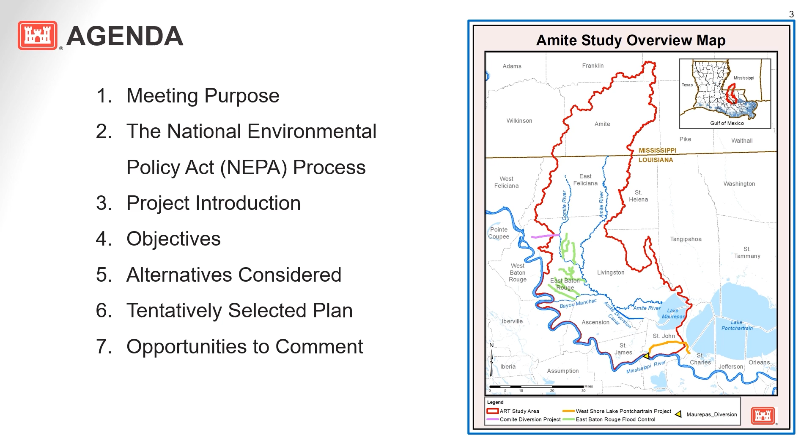So over the next few slides, I'll be covering several items, including the presentation purpose, as well as the background of the feasibility study, which will lead us to the tentatively selected plan. So what is the purpose of this presentation? I am informing you about the Amite River and Tributaries Feasibility Study. The draft report is available for public review now until January 29th, and it provides information on how the tentatively selected plan was selected, as well as provides details of that plan and how the study is complying with the National Environmental Policy Act.

And so our main goal here during the review period and during our scheduled virtual meetings is to hear from the public. And we would like to hear your thoughts on the tentatively selected plan. And so this serves as an opportunity for the public as well as other government agencies and partners to have their voices heard.

And so what is the National Environmental Policy Act, or NEPA? NEPA was signed into law by President Nixon on January 1st, 1970, and it is the underlying environmental law requiring all federal agencies to notify the public of proposed actions, solicit their input, develop and evaluate a range of alternatives, and explain how decisions were reached. And we're at that stage in the NEPA process where we've identified our purpose and need and considered a range of alternatives and their impacts. Currently, the Corps of Engineers has identified a tentatively selected plan for this study and is notifying the public through our report and through the virtual meetings of the proposed action, and we are requesting your input.

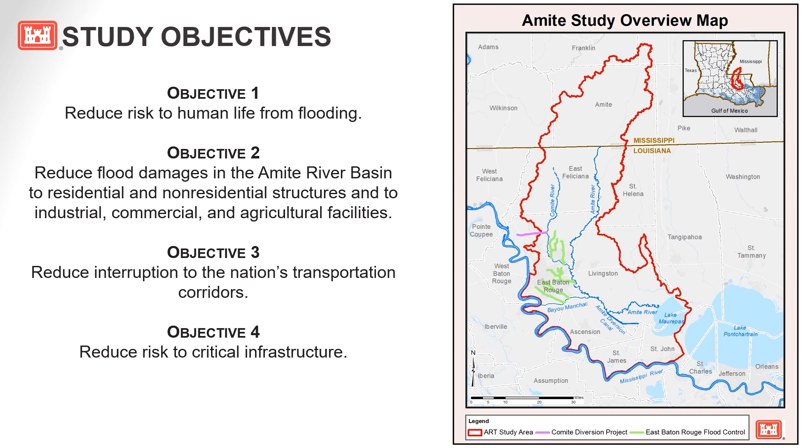And it is important to note the coordination in our feasibility study because it is through early and continued coordination with the public, stakeholders, and other agencies that we develop alternatives and conduct that planning process. And so it is an essential key part of the feasibility phase. And so this coordination helps in determining the appropriate level of documentation and analysis needed in developing and refining the study purpose, goals, objectives, constraints, and the range of alternatives to consider.

And agency coordination helps us determine the impacts to the resources, possible mitigation measures, opportunities for environmental enhancement, as well as in identifying the NEPA and permit requirements of other agencies. And so since the start of this study, we have been engaged with our non-federal sponsor, the Louisiana Department of Transportation and Development. And then during the early phases of planning, we held several public information meetings as well as government stakeholder meetings with federally recognized tribes.

Subsequently, 2 in-person public NEPA scoping meetings were conducted by the New Orleans District in December of 2019. And the purpose of these meetings was to present the stakeholders and the public with alternative plans that had been developed under the study, and then obtain feedback to ensure that the study area's problems were being addressed by the alternatives being considered.

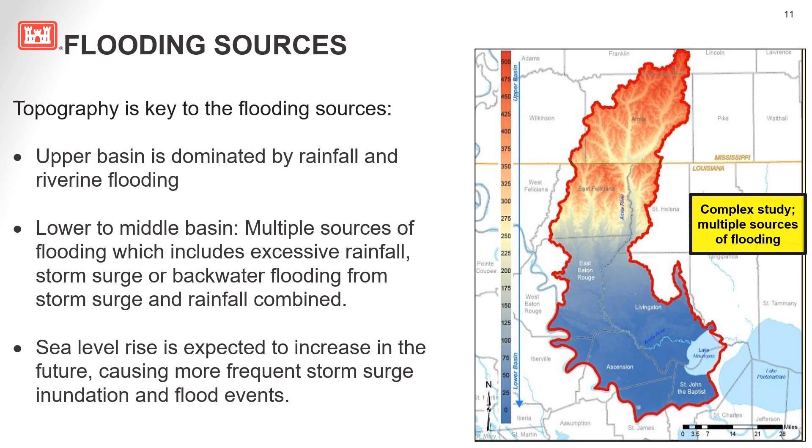The non-federal sponsor for this study is the Louisiana Department of Transportation and Development, and we have partnered with them throughout this process and will continue to do so.

And so the Corps of Engineers refers to studies as being 3x3x3 compliant. And what that means is that studies are to be completed in 3 years, $3 million, and with 3 levels of vertical team engagement and review from district, division, and headquarters. And so this is required by law in the Water Resources Reform Development Act of 2014.

And this process is centered around decision-focused planning rather than, say, task-oriented planning. And so you're reorienting the planning process away from simply collecting data or completing specific tasks, and then you're focusing it on doing the work required to reduce uncertainty to the point where the team can make an iterative sequence of planning decisions required to complete a study in full compliance with environmental laws and statutes.

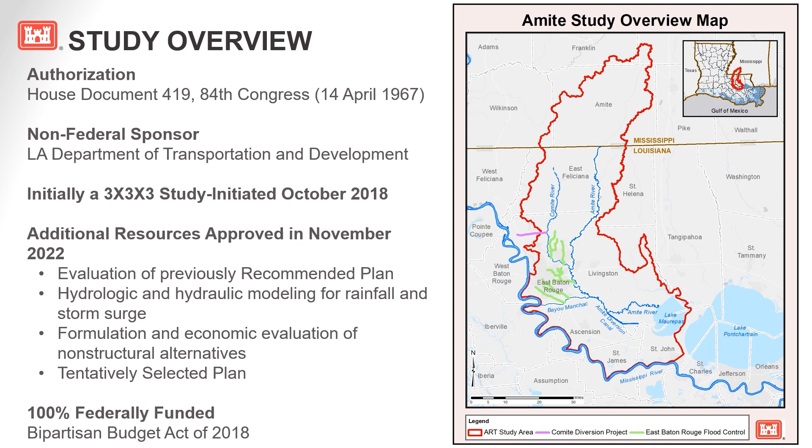And so the decision to approve the request for additional time and funding was approved by the Assistant Secretary of the Army for Civil Works in November of 2022. And the team conducted extensive hydrologic modeling and a non-structural evaluation, which led us to a tentatively selected plan. And so that request for additional time and funding included an effort in the amount of $1.91 million and another 20 months of non-structural evaluation.

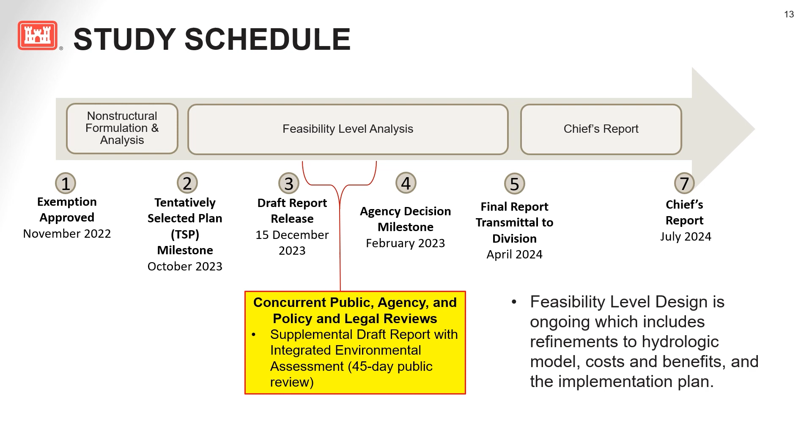And so since the beginning of this feasibility study, it was identified within this large study area that the topography played a key role in how we address the flood risk management. And so in the upper half of that basin, water flows to the south. But once you reach that middle terrace area, the topography is very flat, and that can limit the planning process. And this very flat area in the lower half of this basin includes areas where influences of river stages are impacted by backwater flooding and surge.

And so since the study authority limited the formulation of alternatives to flood risk management for rainfall and riverine flooding, the team focused very heavily on large-scale solutions. And once those were identified, the alternatives were then focused on identifying structural solutions based on economic damages. Non-structural alternatives were also developed concurrently with a focus on socially vulnerable communities.

And then before I move on here, both rainfall and storm surge were modeled in our evaluation. While it was limited to flood risk management, which is specific to impacts due to flooding from rainfall and riverine flooding, storm surge was considered as a residual risk for these structures.

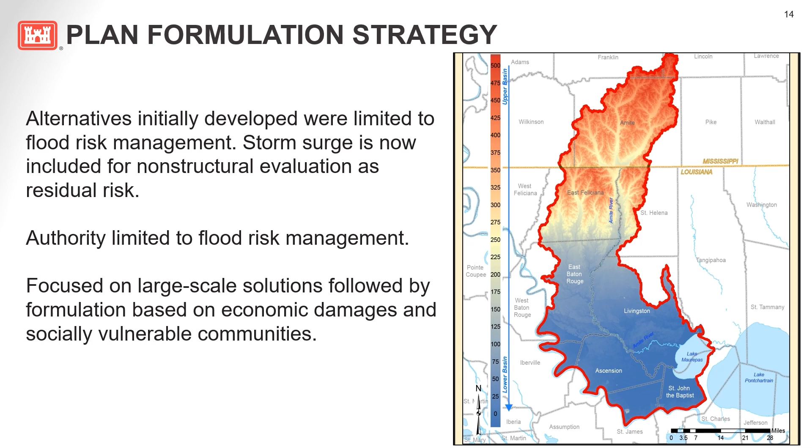Going back to 2019 again here, a draft report was released which identified a tentatively selected plan that included a large-scale dry dam, otherwise referred to as the Darlington Dam, as well as a non-structural component for residual risk. And essentially there'd be structures that would still see flood risk with the dam in place, and that would involve elevating those homes and flood-proofing those businesses.

And that would have been an earthen dam, approximately 80 feet high, located between East Feliciana and St. Helena parishes. And this plan had a total cost of $2.3 billion and a benefit cost ratio of 1.2. These are numbers from 2019. And while this plan was preliminarily determined to be feasible, there were concerns raised during reviews as well as during evaluation, and we did regroup with our non-federal sponsor, and specifically the state of Louisiana, and revised our path forward to include further evaluation of a non-structural plan.

The previously recommended plan has since been screened out due to several concerns, one of which has to do with implementability. There is a lack of soil data in the area of the dam, and that is required to inform the design. We would need that data in order to provide a sufficient design to ensure constructability. Additionally, due to the unknowns inclusive of the soils and the area, cost contingencies for that plan are certainly higher than they were in 2019.

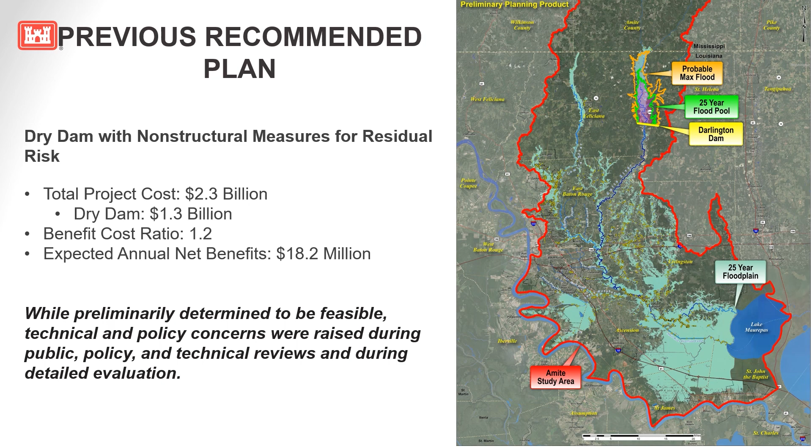There were several other plans considered in that final array of alternatives, including the Darlington Dam, and after that final array was re-evaluated and based on the concerns and available information on the Darlington Dam, that alternative was deemed to not meet risk guidelines due to economic risk and cost effectiveness, as well as potential societal life risk and environmental acceptability. And so again, for those reasons, the Darlington Dam alternative, as well as the dry dams along tributaries that we looked at, were removed from further consideration, consistent with policy of acceptability and implementability.

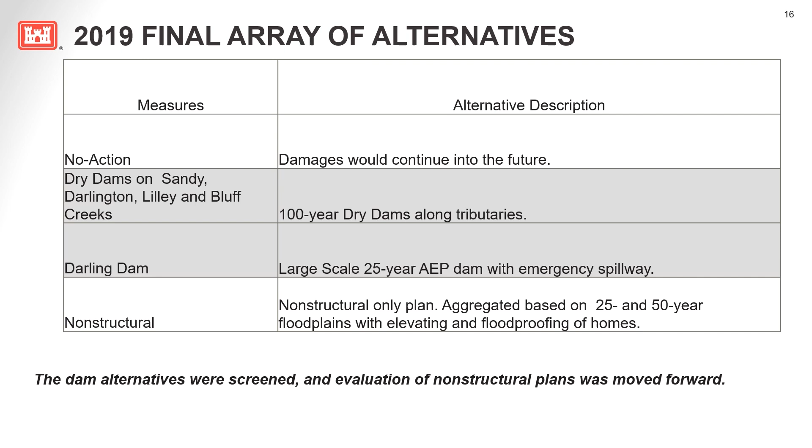And so once we screened those dams, the evaluation of a non-structural only plan was moved forward. And what do we mean when we say non-structural only plan? Under a non-structural only plan, you would be talking about measures for potentially eligible structures that would see elevating residential structures up to the 100-year level of protection, and that would be no greater than 13 feet above the ground. You could see dry flood proofing of structures to ensure that the floodwaters can't get inside, making the walls, doors, windows, other openings impermeable to water, and that would be done up to 3 feet above grade.

Wet flood proofing is also a non-structural measure, and that would include wet flood proofing structures up to 12 feet to prevent damages. And then you can also see other risk mitigation measures under a non-structural plan, which would be typically conducted by local entities such as the state, and those can include floodplain management plans, building codes, zoning regulations, and flood warning systems. And so there are many benefits to a non-structural alternative, and that includes minimal to no operations and maintenance, minimal to no environmental impacts, and long-term risk reduction by reducing recurring flood damages. And another aspect of non-structural plans could usually include acquisition or buyouts and relocating those structures. For this specific study, that measure was not cost effective, and it did not move forward.

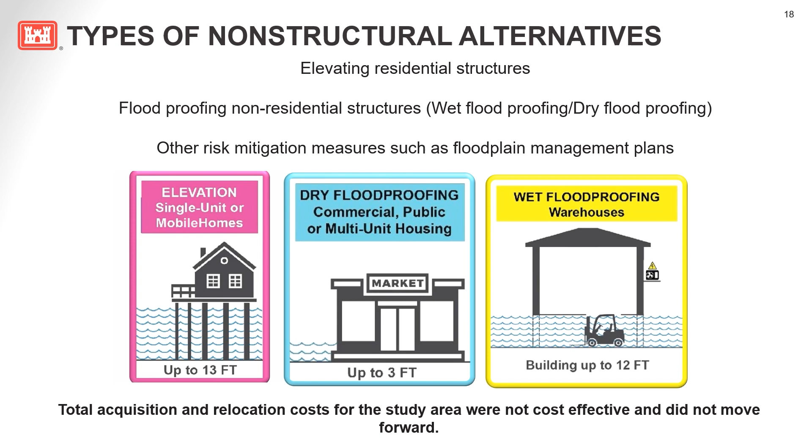And so thinking back to 2019 again, we looked at a non-structural only plan in our final array of alternatives. And that plan included eligibility for structures located within the 25-year floodplain throughout the entire study area. And continuing our non-structural evaluation, we optimized that plan by grouping structures together that shared similar flood characteristics, such as a shared flood source. And so there are 106 economic reaches in the study area, and there were 57 groupings or aggregates of structures identified according to shared flood characteristics.

And so aside from the number of structures identified within the 25-year floodplain, structures were identified as being located in the 10 and 50-year floodplain, and those were considered in the economic evaluation as well. And the first developed non-structural alternative was the National Economic Development Plan, and that is the plan that maximizes your net benefits or reduces the most damages from flooding.

And so an assessment of all structures located in the 10, 25, and 50-year floodplain was performed, and the net benefits of each separate grouping or aggregate of structures was analyzed based on the damages they would incur. And so when maximizing these benefits on the individual aggregate or grouping level, the National Economic Development Plan included 46 aggregates or groupings within the 10-year floodplain, 5 within the 25-year floodplain, and 6 within the 50-year floodplain. And so in total, over 3,100 structures would potentially be eligible to participate in the National Economic Development Non-Structural Plan.

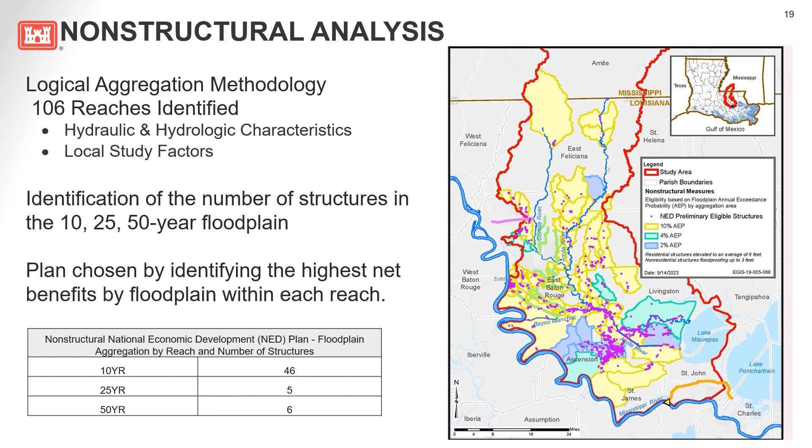And so after we developed the National Economic Development Plan, the team conducted a total benefits analysis. And 2 alternatives were developed to increase comprehensive benefits, and more specifically, flood risk management benefits to socially vulnerable communities. And the primary database that was used to represent social vulnerability data was the CDC's Social Vulnerability Index. And this database was utilized over other tools because the 4 themes that make up that index are designed to represent how well a community responds and recovers from a natural disaster like a major flooding event, making this database specifically applicable to a flood risk management study.

And so social vulnerability data included representation for socioeconomic status, age, disabilities, language, minority status, housing, and transportation. And areas that were in the 90th percentile or higher were flagged as having high social vulnerability. And embedded in that overall social vulnerability score is the 2 metrics necessary for environmental justice documentation under Executive Order 12898. And because of this reason, the team felt that this was an appropriate tool to address environmental justice and social vulnerability in a flood risk management setting.

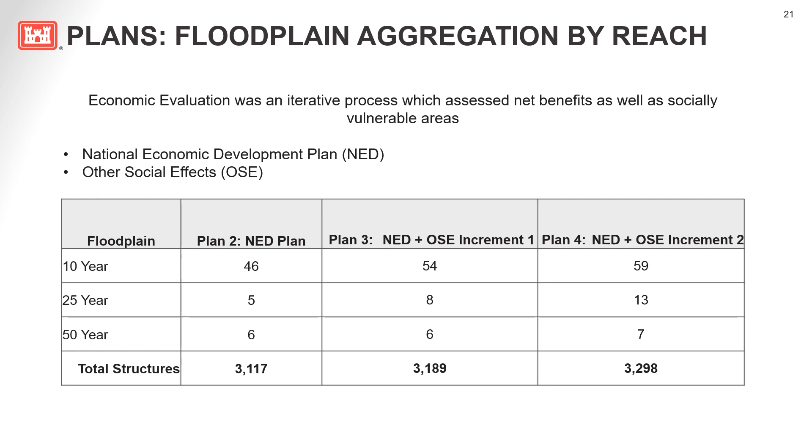And so what portion of the structures eligible to participate in the plan are located in environmental justice communities? And environmental justice, as it relates to the Justice 40 initiative, according to Presidential Executive Order 14008, was evaluated by determining how many structures are included in the plans within areas of concern according to the Council on Environmental Quality's Climate and Economic Justice Screening Tool.

And so Plan 2 included 1,262 structures, or 40% of total structures in areas of environmental justice concern. Plan 3 included an additional 22 structures in areas of environmental justice concern for a total of 1,284 structures, or 40% of the total eligible structures in the plan. And then lastly, Plan 4 included an additional 62 structures in areas of environmental justice concern for a total of 1,324 structures, or 40% of the total eligible structures in the plan.

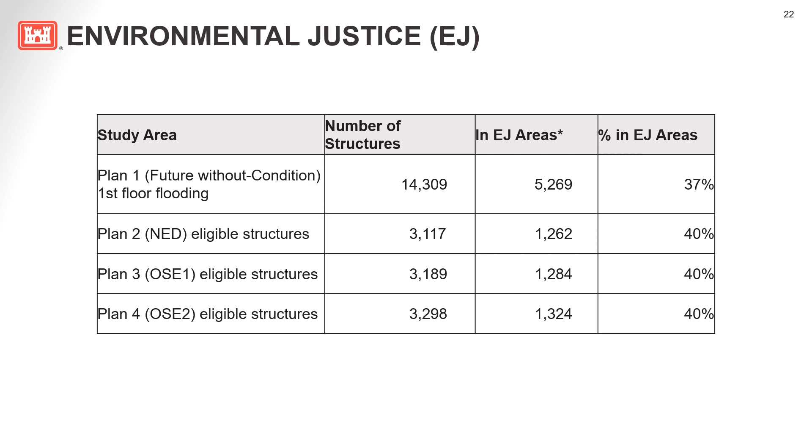The tentatively selected plan presently is Plan 4, the non-structural plan with the additive for other social effects for positive and negative benefits, because it provides flood risk reduction in terms of national economic development, along with the added benefit of flood risk management to vulnerable and disadvantaged communities, maximizing the benefits to those socially vulnerable areas. And so while this plan is not the NED plan, it provides the best level of comprehensive flood risk reduction to the study area and is the total benefits plan for this study.

And so this plan has a preliminary cost range between $1.5 billion to $1.6 billion with a benefit to cost ratio within a range of 1.06 to 0.997. These costs and benefits will continue to be refined in the feasibility process. A policy exception must also be granted to recommend the total benefits plan, and if that exception is not granted, that plan, our tentatively selected plan, will resort back to Plan 2, our non-structural national economic development plan.

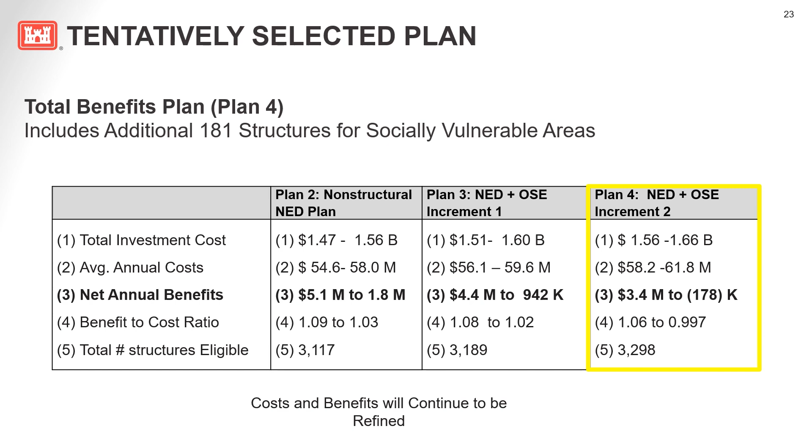And so in summary, the net benefits of each aggregate or grouping of structures which employed the aggregation method as described previously were analyzed based on the damages that would incur. And so using this method, 57 floodplain aggregates, again, or groupings of structures, were identified. And the net benefits of each aggregate were analyzed based on the damages they would incur at the 10, 25, and 50-year events. The event that had the highest return of net benefits per aggregation was chosen.

And next, the aggregates used to identify that National Economic Development Plan were further subdivided into 19 socially vulnerable sub-aggregates. The primary database used to represent social vulnerability data was the CDC's Social Vulnerability Index, and the next highest aggregation for each of the socially vulnerable sub-aggregates, regardless of economic justification, was included to identify the total benefits plan.

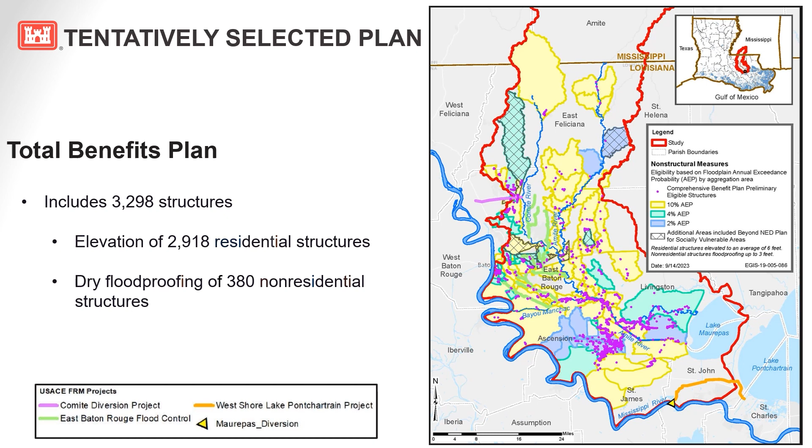And so what's next? We will continue to receive public comment as well as comments from our technical experts across the Corps of Engineers and policy and legal compliance comments from our division and our headquarters. And the team will address these comments as necessary, and we would be headed towards an agency decision milestone at the end of February. This milestone, if successful, would mark the agency's endorsement of the plan and the approval to move forward with finalizing the report.

Again, if successful at that milestone, the team would be finalizing the report and going through more agency technical reviews, another round of legal reviews prior to submitting the report to our division in April for final policy and legal compliance reviews, as well as state and agency reviews and a final public review. And so there are several rounds of review remaining. A chief's report would then mark the completion of the study in July.

And so in July, that chief's report would be signed by the Chief of Engineers for the Corps of Engineers. And it is important to note that that is not the last stop before construction. This plan would require at least 2 congressional actions to move forward to that phase. Authorization for construction would be required, as well as appropriations. And so we would need funding to proceed with pre-construction engineering and design and the construction phase itself. At the very earliest, 2026 would be when construction could start, assuming that authorization and appropriations are in place at that point.

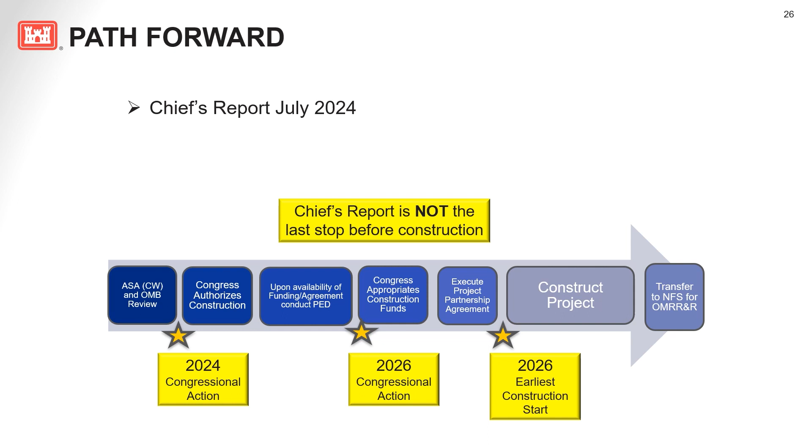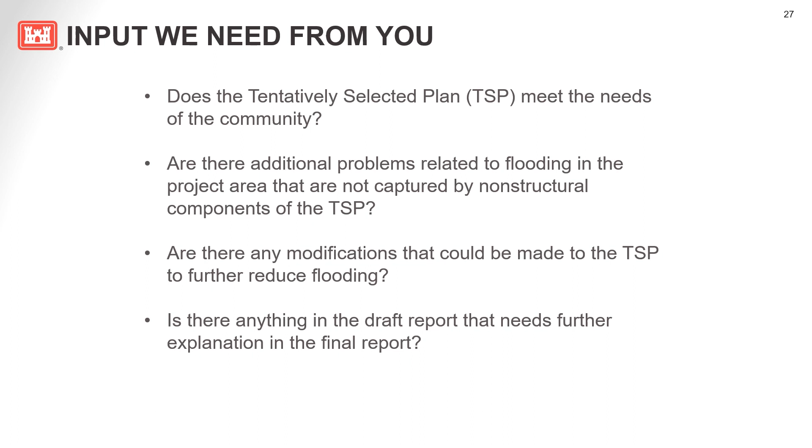And so with that, that does conclude the presentation regarding the Amite River and Tributaries Feasibility Study Tentatively Selected Plan.